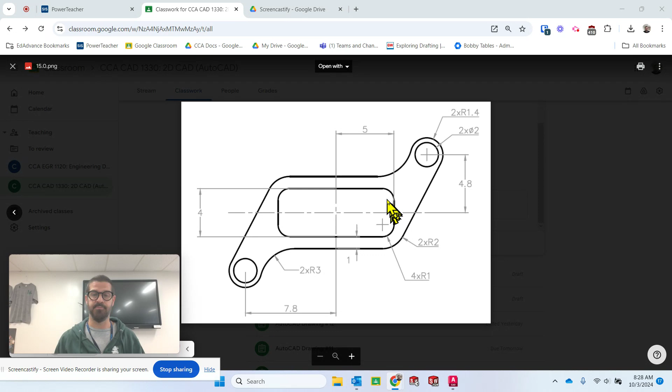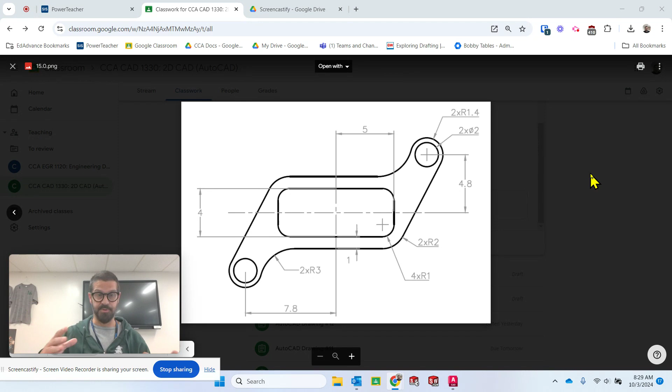You can see a rectangle with some filleted corners, and all the fillets are one. You can see kind of what could be a bigger rectangle. Everything around it has a distance of 1 between here and here. So we know we can make that with an offset of the whole shape. We know how to offset lines. Remember, if you just pick a whole shape like a rectangle, it offsets the whole thing, making it bigger or smaller by a specified amount.

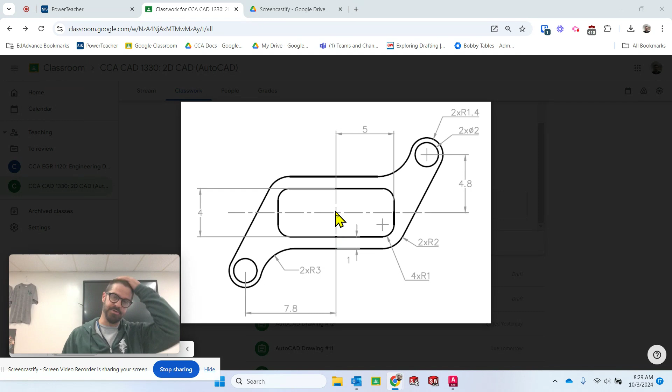So we can start by making a rectangle and a bigger rectangle that's offset, filleted all the corners. Then all we have to do is figure out how to make this little jutting out part right here and that little jutting out part right there. They give us the dimensions of where everything is, but you might have to look in different parts of the diagram, which is slightly tricky but not too tricky. So we can assume some level of symmetry - same going down from the middle as going up from the middle, same left from the middle as right to the middle.

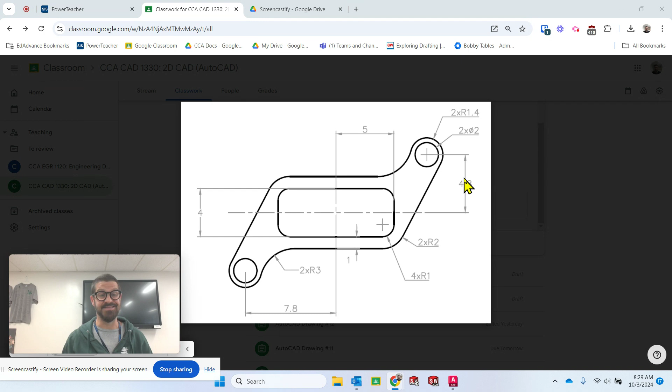So we know that the center point of this circle is 7.8 units over - we'll assume it's inches - over this way. Even though it doesn't tell us how far down it is, it does tell us how far up this one is, and we'll just make the assumption that it's the same on both sides, because there's no reason to assume it's different unless they tell you it's different. But sometimes it's not always right. Anyway, we're going to make the assumption on this one. So the center point of this circle, both of these circles, is 7.8 over to the left from the origin, and it's 4.8 inches down from this center horizontal construction line we're going to draw.

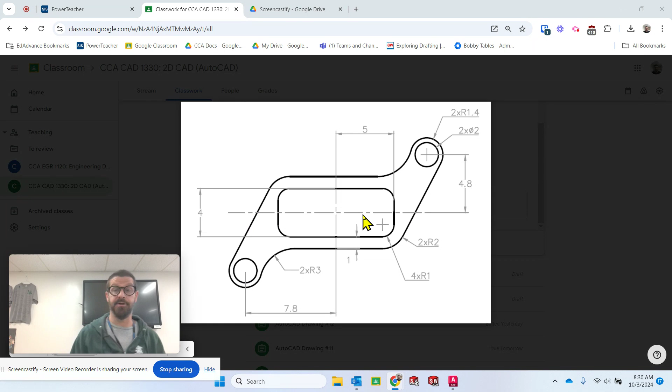At that point on each side, we got two circles we're going to make. One of them is going to have a diameter of 2, and one of them is going to have a radius of 1.4 or a diameter of 2.8. Then once we got those two circles in place, all we have to do is join them, join this line to that outer rectangle, and then we're going to draw this curve right here.

What I want you to notice really quickly is that anytime you see a curved line like a circle or an arc that blends almost perfectly, seamlessly, fluidly into a straight line, that is an effect you can achieve with a tangent line. That's the whole point of a tangent line - it's a straight line that intersects with a circle or arc at exactly one point. So right here is going to be the point where this curved line turns into a straight line. Same thing here - straight line turns perfectly into a curved line, and it's going to be achieved by using tangent constraints.

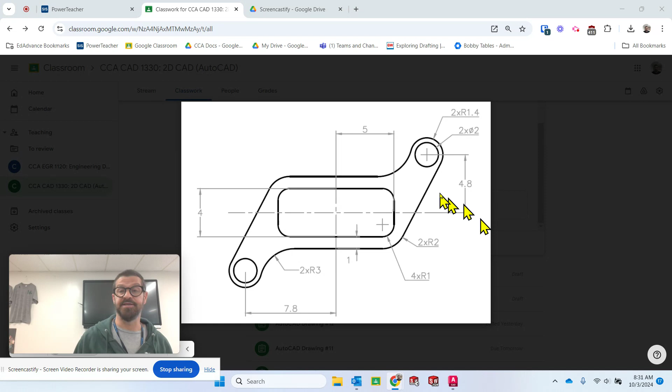So this is going to end up just being a line we draw with a tangent using the way we've done before, which is click on the shift, click right click, and then click on the element we want it to be tangent to. I'll show you in the walkthrough. Then here we're going to achieve this by doing a special kind of circle called a tangent tangent radius circle, and trim away the parts we don't want. And that's about it.

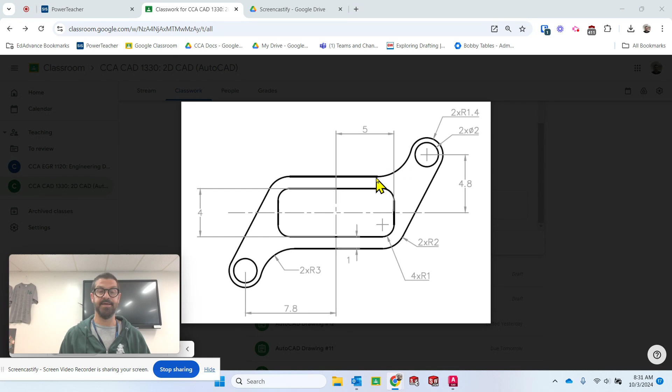I think you're going to find this one pretty straightforward as well, and not take that long. I'm going to walk you through it in the walkthrough video in a little bit.